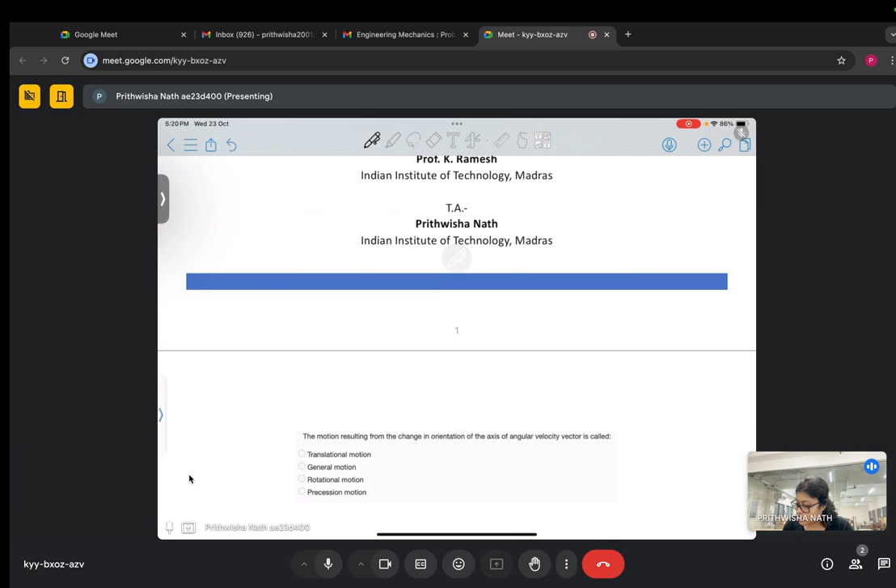The first question is: the motion resulting from the change in orientation of the axis of the angular velocity vector is called. The options are translational motion, general motion, rotational motion and precession motion. So which option is correct? It is precession motion, right? So that will be precession motion.

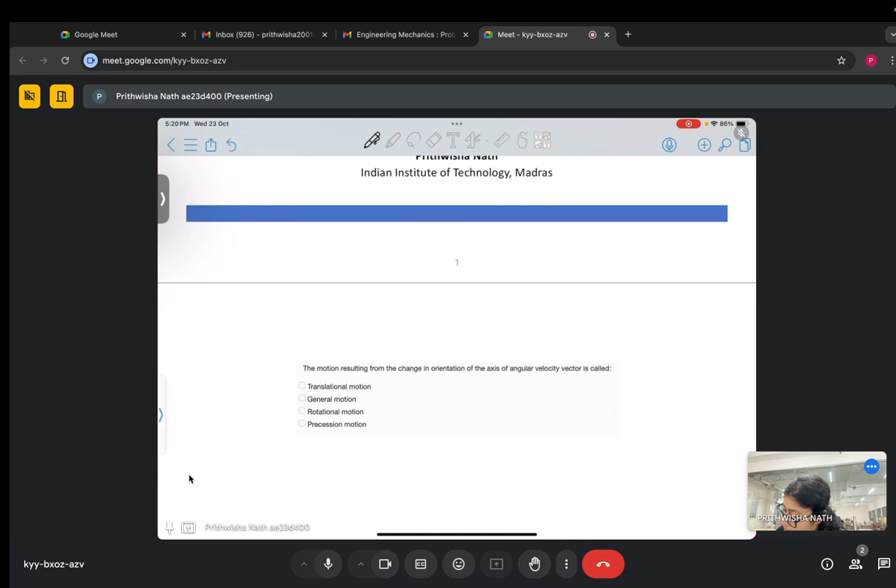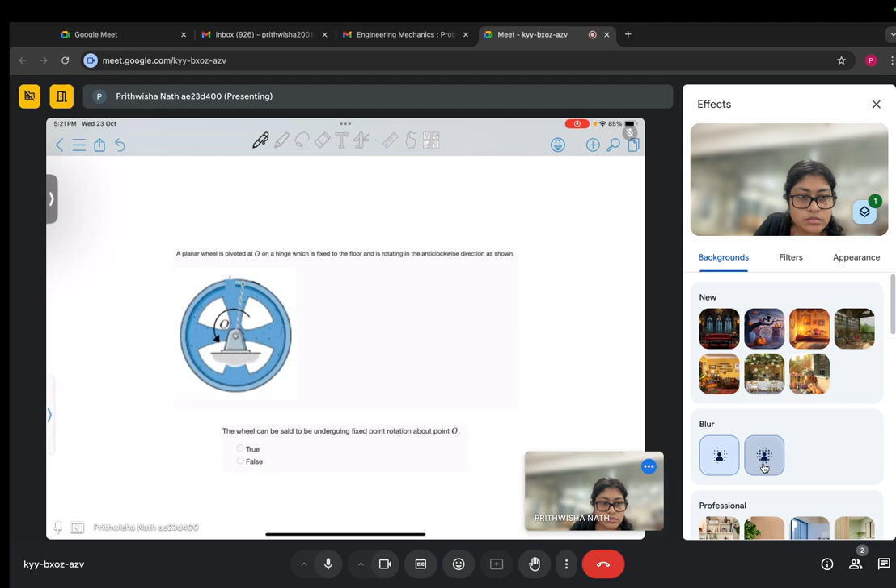Moving to the next problem: a planar wheel is pivoted at O on a hinge fixed to the floor and is rotating in the anti-clockwise direction as shown. The wheel can be said to be undergoing fixed point rotation about point O. Is this true or false? The wheel is not undergoing fixed point rotation, so this is false.

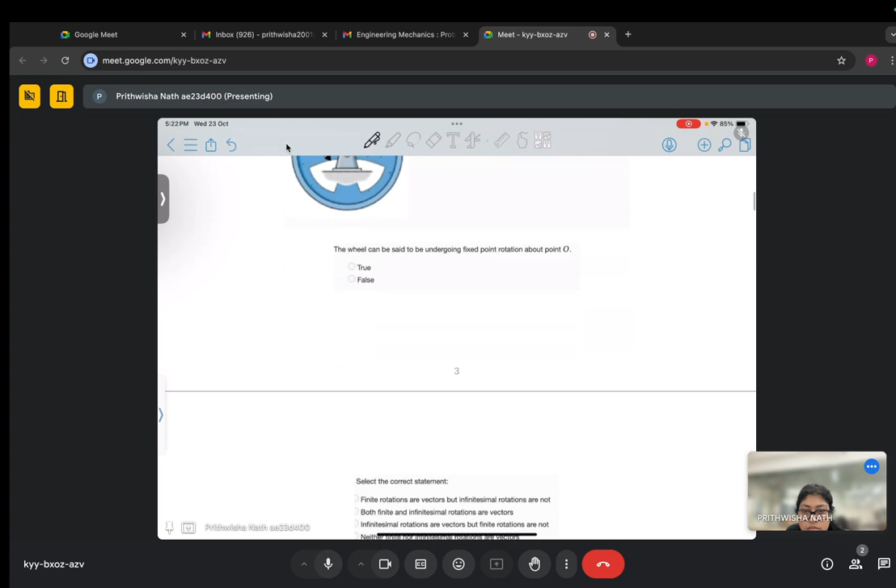Moving on to the next problem, select the correct statement.

Select the correct statement. Option one: finite rotations are vectors but infinitesimal rotations are not. Option two: both finite and infinitesimal rotations are vectors. Option three: infinitesimal rotations are vectors but finite rotations are not. Option four: neither finite nor infinitesimal rotations are vectors. So which option is correct? The third option is correct, that is, infinitesimal rotations are vectors but finite rotations are not.

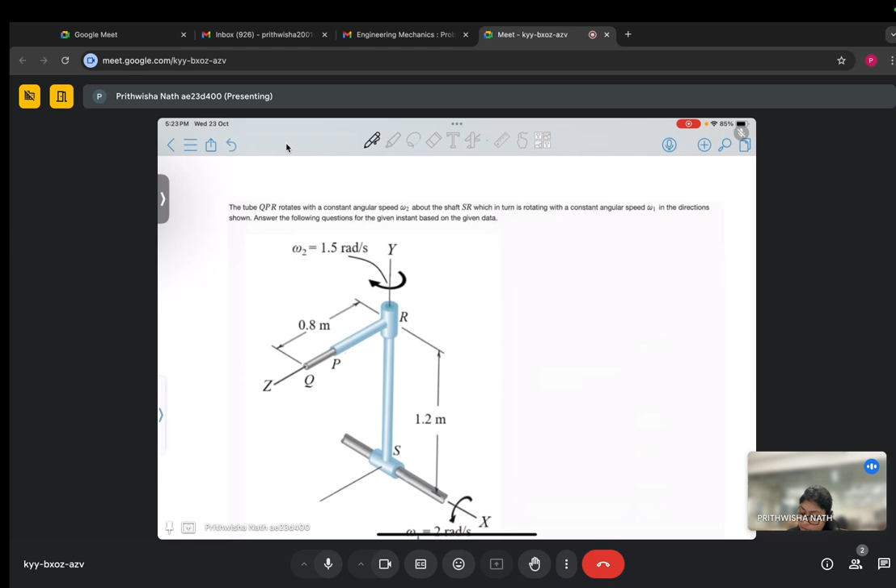Now moving on to the next problem. The tube QPR rotates with a constant angular speed omega 2 about the shaft SR, which in turn is rotating with constant angular speed omega 1 in the directions shown. Answer the following questions for the given instant based on the given data. Omega 2 is given as 1.5 and omega 1 is 2. So the tube QPR rotates with angular speed omega 2 about the shaft, and the shaft itself rotates with angular velocity omega 1. Now what are the questions we need to answer?

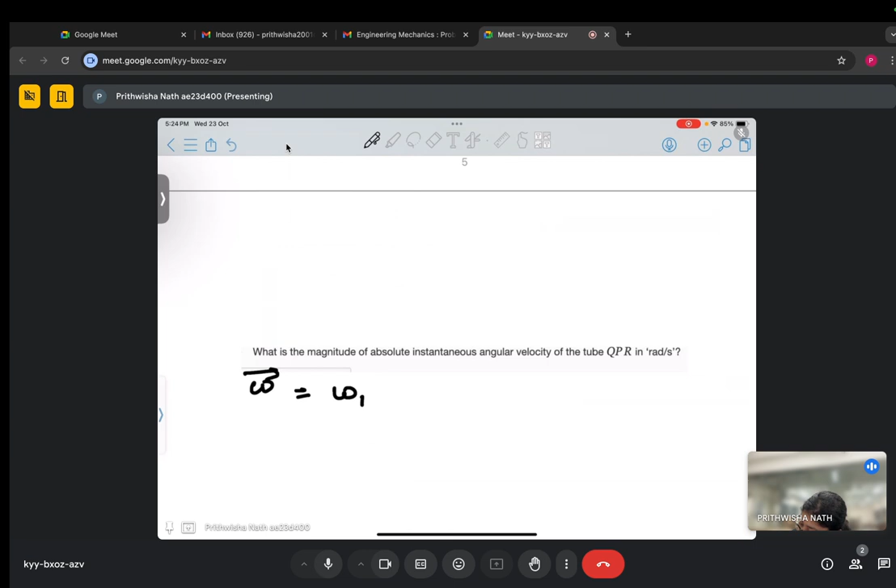What is the magnitude of absolute instantaneous angular velocity? How can we find omega? Omega is nothing but omega 1 plus omega 2. Now what is omega 1? Omega 1 is 2i, and omega 2 is minus 1.5j.

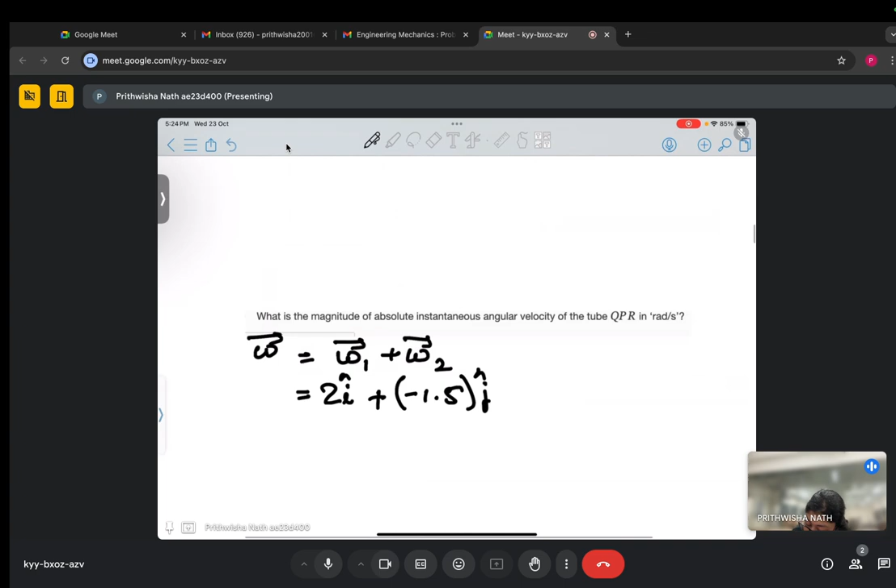So omega can be written as 2i minus 1.5j. Now we need to find the magnitude of the absolute instantaneous angular velocity. For doing that, we just compute the magnitude of omega, which gives us the answer in radian per second.

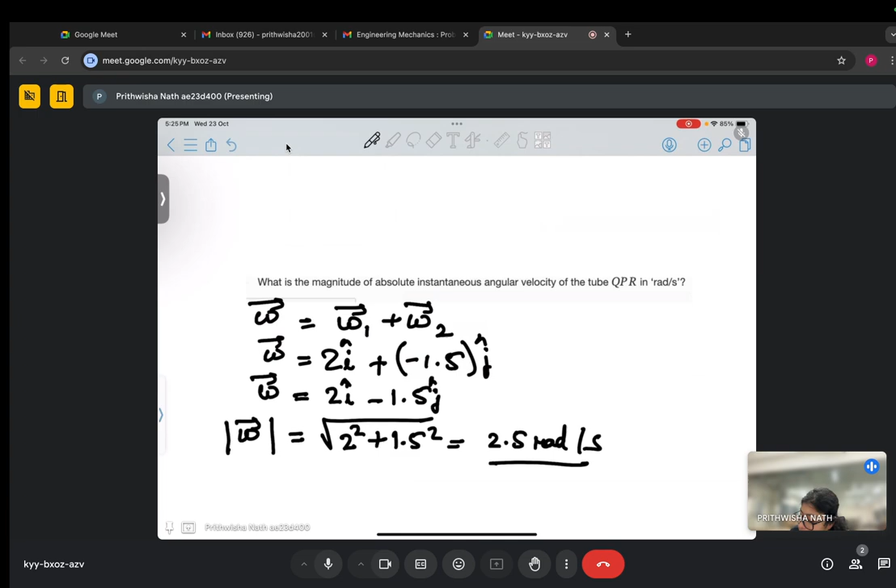Now for the next part of the problem: what is the magnitude of absolute instantaneous angular acceleration of the tube QPR in radian per second square? We need to find the magnitude of the absolute instantaneous angular acceleration. So alpha can be written as this.

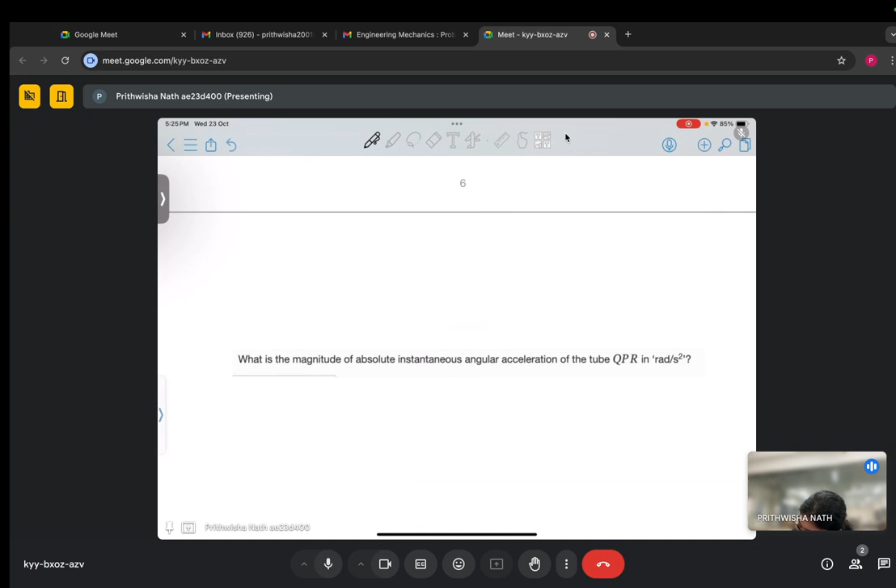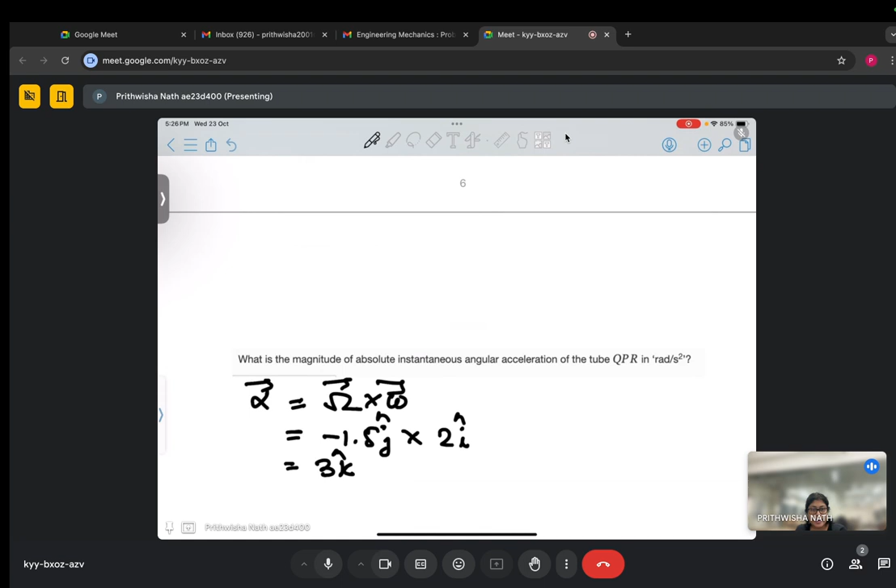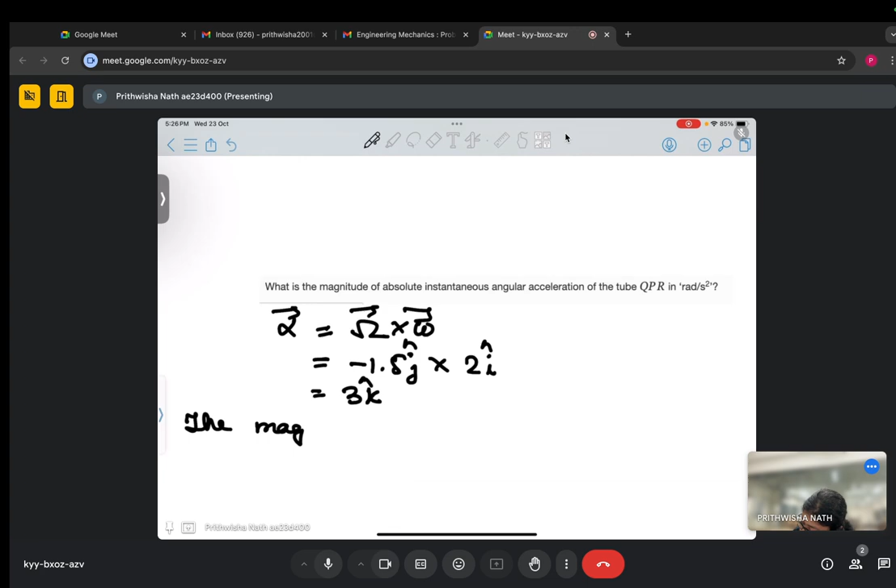We know that this is minus 1.5j cross 2i. Then what is the magnitude? The magnitude is nothing but 3. So the magnitude of the instantaneous angular acceleration of the tube is 3 radian per second square.

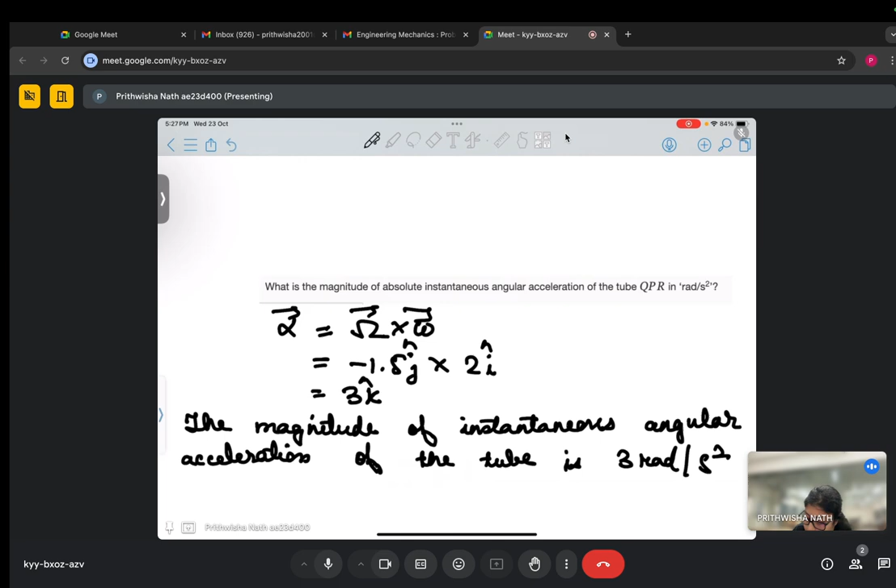Now they have asked for the x component of v. For finding the x component of v, first we need to find the position vector. What is the position vector? It can be seen from this figure: it is 0i, 1.2j and 0.8k. So R is nothing but 0i plus 1.2j plus 0.8k.

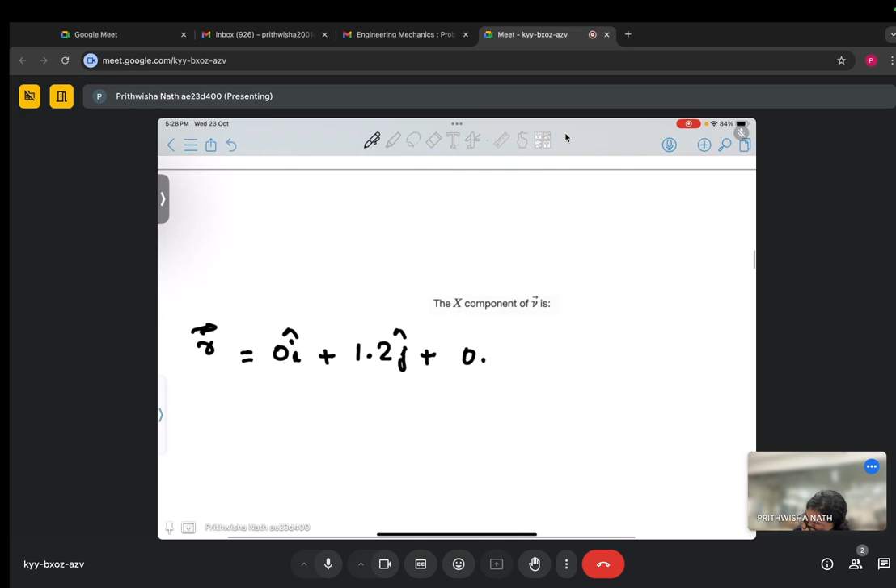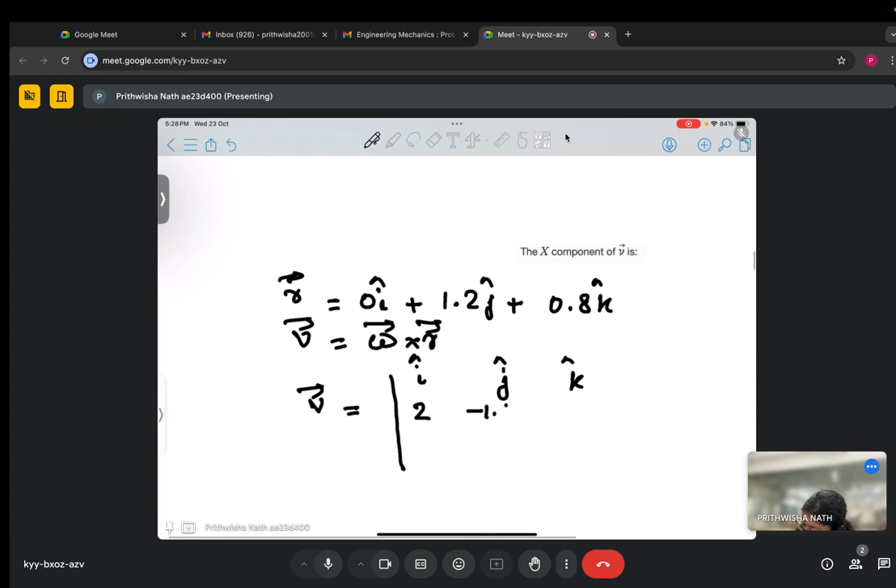V equals omega cross R. Then we just need to find the cross product. This is 2, minus 1.5, 0 cross 0, 1.2, 0.8. So you just calculate the cross product: i times minus 1.5 into 0.8, minus j times 2 into 0.8, plus k times 2 into 1.2. So that is nothing but minus 1.2i minus 1.6j plus 2.4k.

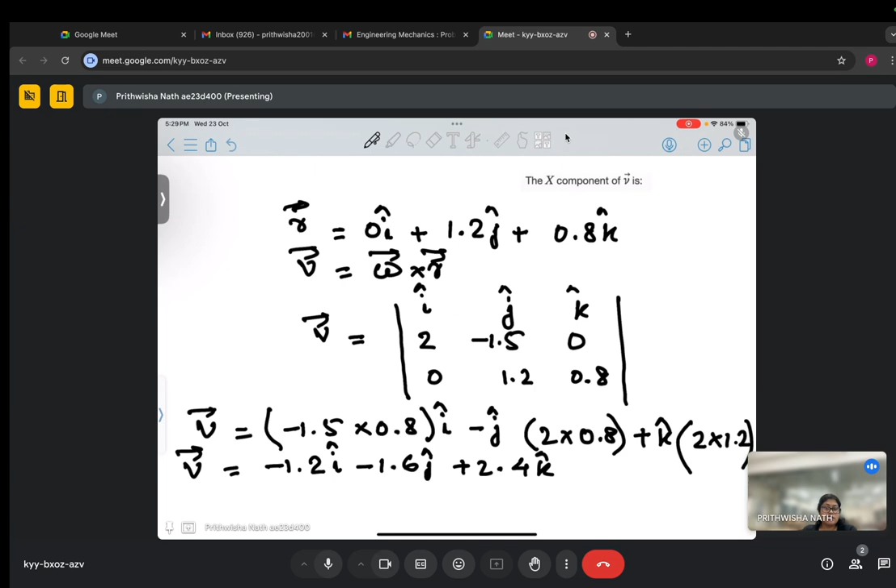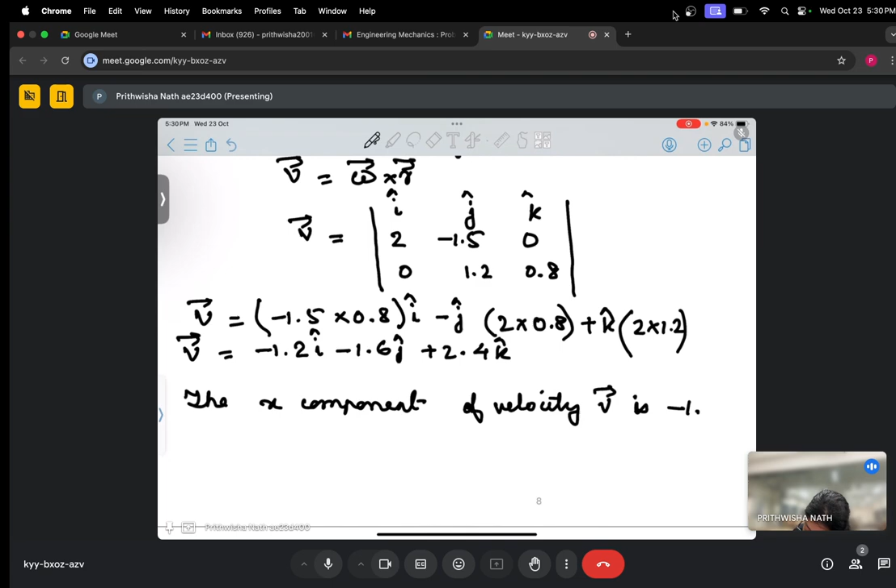Here they have asked us to calculate and find the x component. It's clearly seen that the x component is minus 1.2, the y component is minus 1.6, and the z component is 2.4. So the x component of velocity v is minus 1.2 and the y component is minus 1.6.

And the z component of v is nothing but 2.4.

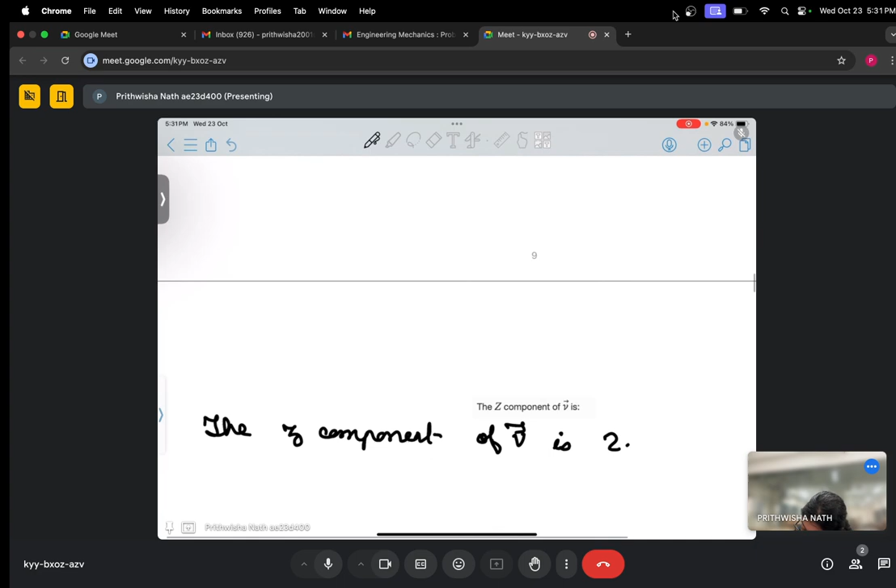Now moving on to the next problem. A crane operating at site constantly rotates at 1 radian per second about its vertical as shown. The boom of the crane supporting a weight is being lowered with angular velocity and angular acceleration as shown. Considering the positive coordinate directions as shown, answer the following questions for the instant depicted.

So what are the questions that we need to solve? They have asked us to find out the magnitude of the instantaneous angular velocity of the boom in radian per second.

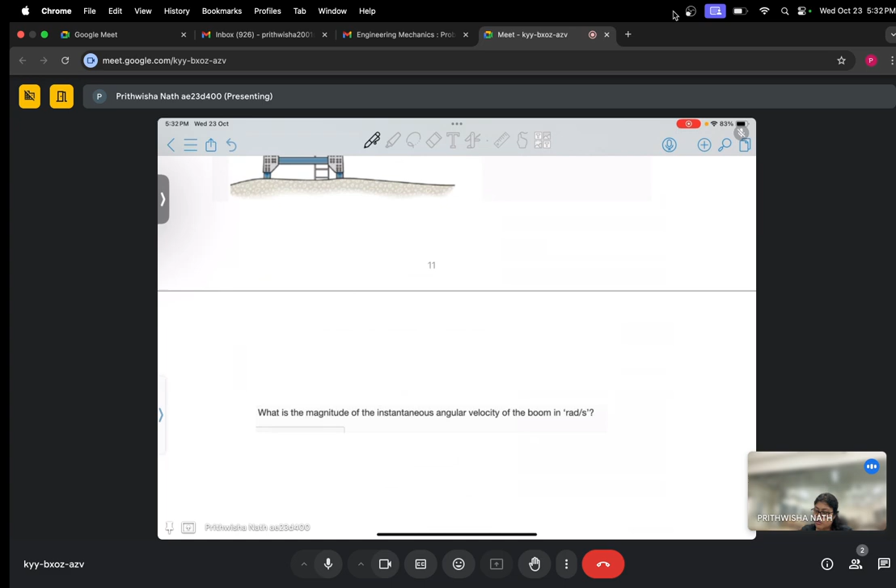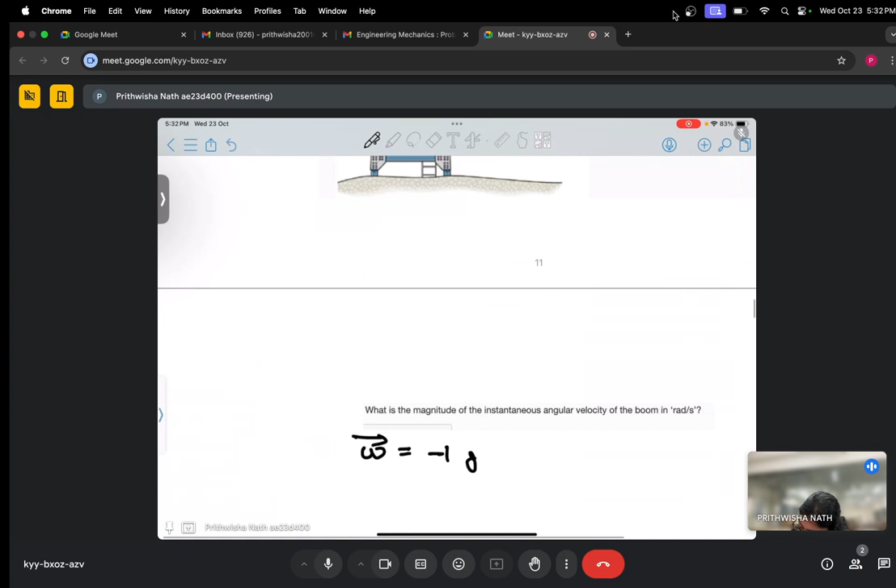So what is omega? Omega is nothing but this should be minus 1 j cap minus 0.5 k cap. So magnitude of omega will be nothing but square root of 1 square plus 0.5 square. That is 1.12 radian per second.

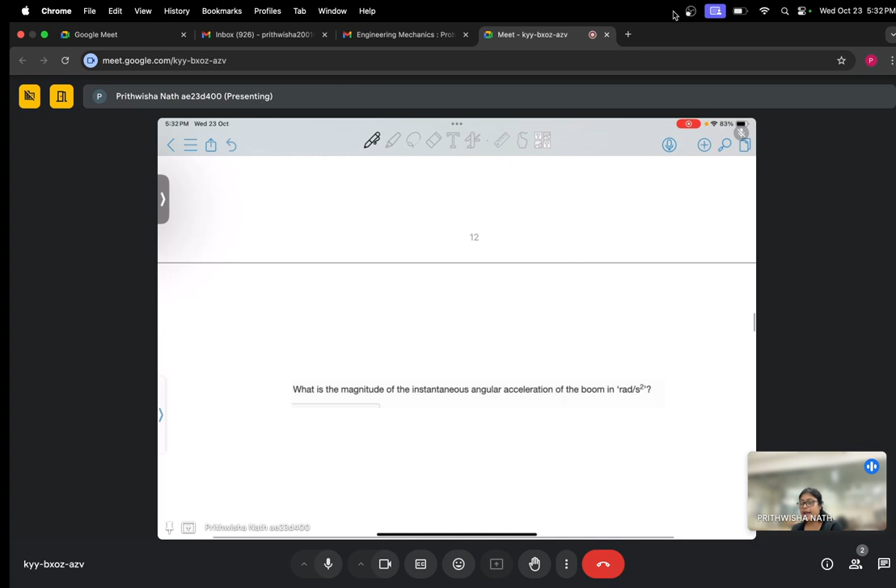Now what is the next question? What is the magnitude of instantaneous angular acceleration of the boom? Now first we need to find out alpha 1, that is minus 1j cross minus 0.5 k. So this is nothing but 0.5 I. Now there is another acceleration, that is this beta double dot, 0.2.

So the total acceleration would be the instantaneous acceleration of the boom in boom is alpha, that is 0.5 I plus 0j minus 0.2 k.

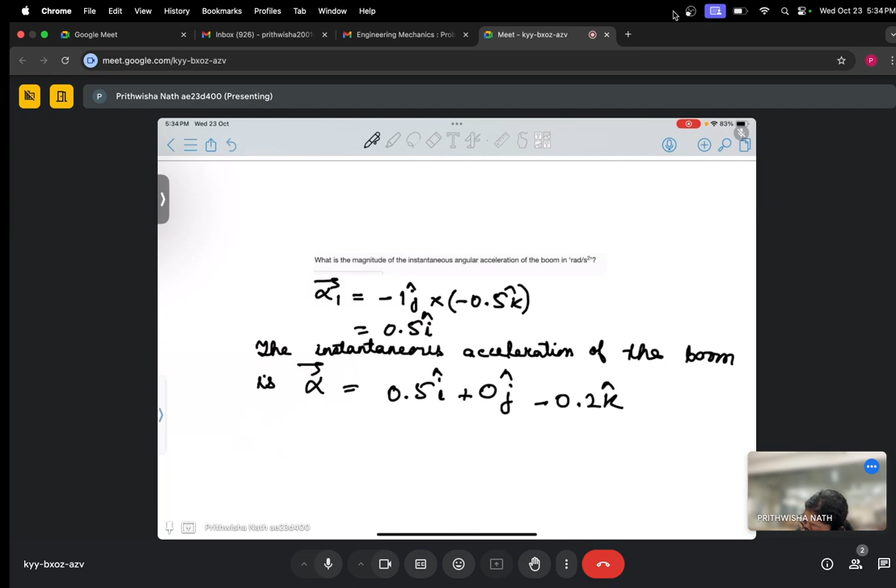Therefore, what is the magnitude? It's nothing but square root of 0.5 square plus 0.2 square. So the magnitude of the instantaneous angular acceleration of the boom is 0.54 radian per second square. So this is the magnitude of acceleration.

Now what they have asked is, let Vp represent the absolute instantaneous velocity of the tip of the boom in meter per second. So they have asked us to find out the x component of Vp.

So for finding out Vp, first we need to know the position vector of the point P. Thereafter we can find out omega cross r to find Vp. So first we have to know the position vector. The position vector of P is r, let it be r.

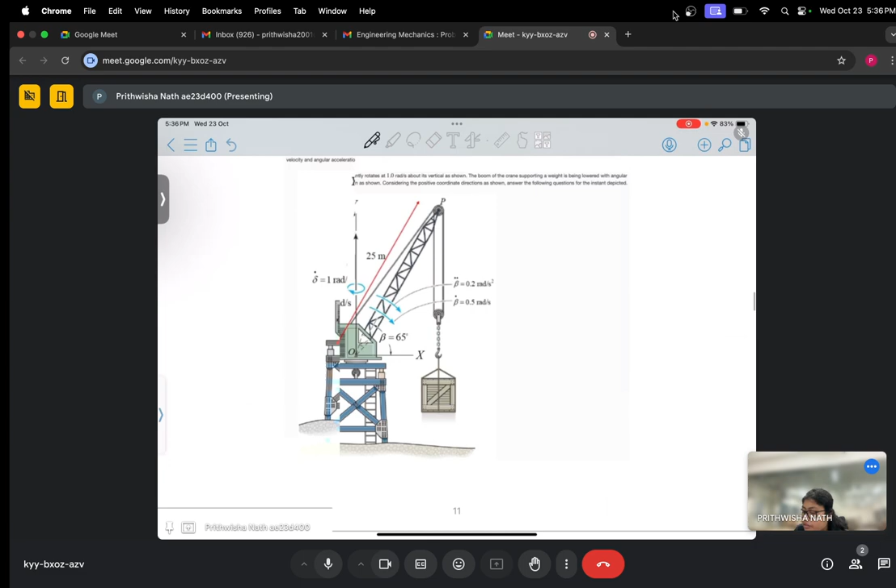So from the figure we can see that the x component is 25 cos of 65 degree and the y component is 25 sine 65 degree. So r is 25 cos 65 I plus 25 sine 65 j plus 0 k.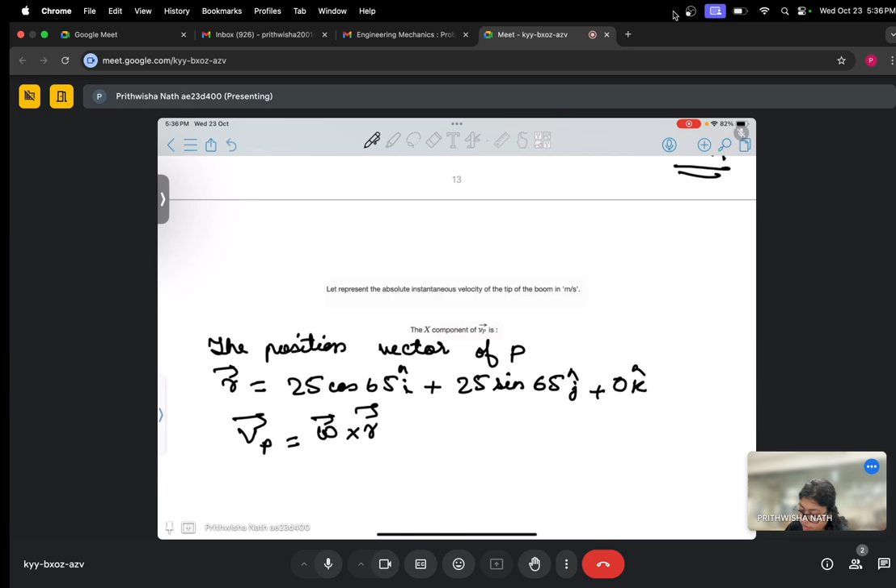Now to find out the instantaneous velocity, now we know omega, we know r, so we can calculate Vp. So let's write this: 0I minus 1j minus 0.5k cross 25 cos of 65 I plus 25 sine 65 j plus 0 k. Therefore Vp will be

I j k. Write it in the next page. So this will be (0.5) into 25 sine of 65 degree, 0.5, 25 cos 65 degree, 25 cos 65 degree. So I just need to simplify this now.

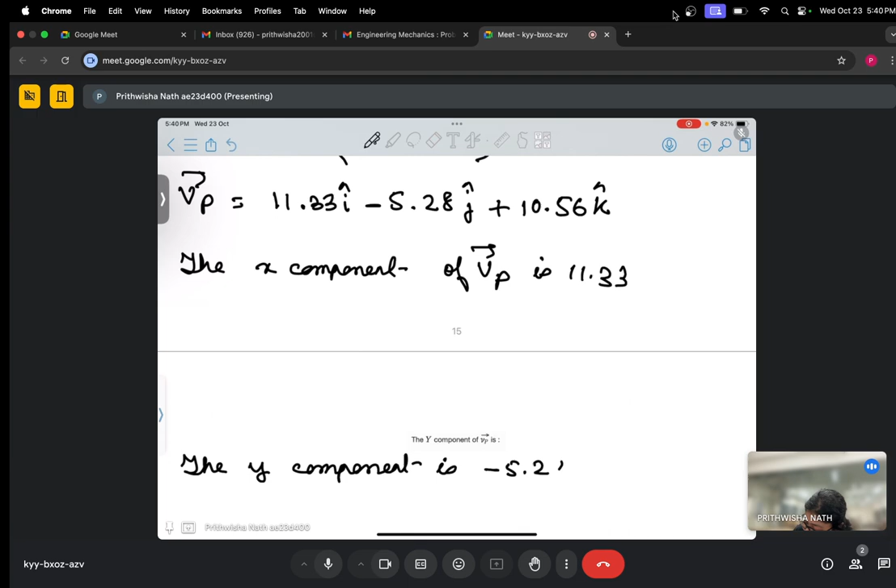So what we need to find is the x, y and z components. So from here we can see what are the x, y and z components. So the x component is 11.33. The y component is minus 5.28 and the z component is 10.56.

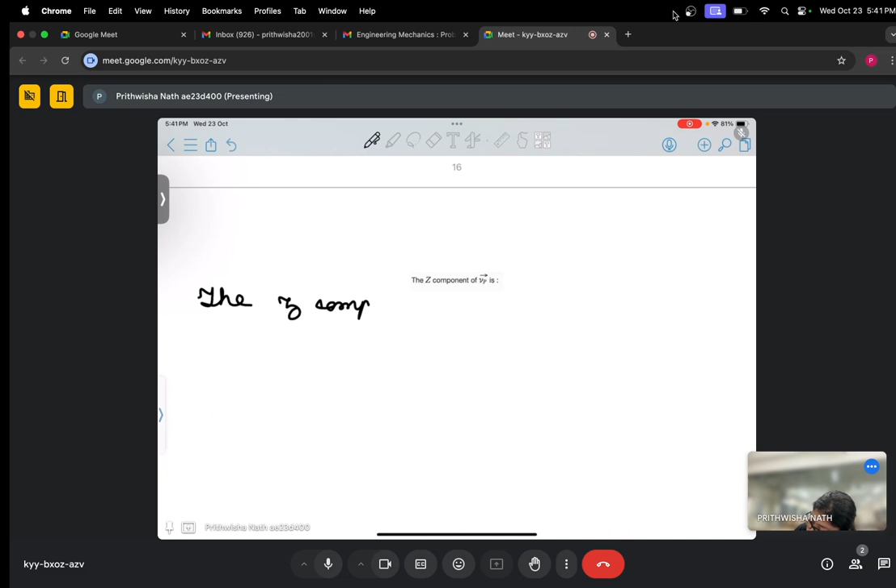Now what we need to do is the next problem, the next part of the problem, what they have asked is let AP represent the absolute instantaneous acceleration of the tip P, and they have asked for the x component of AP, the y component of AP and the z component of AP.

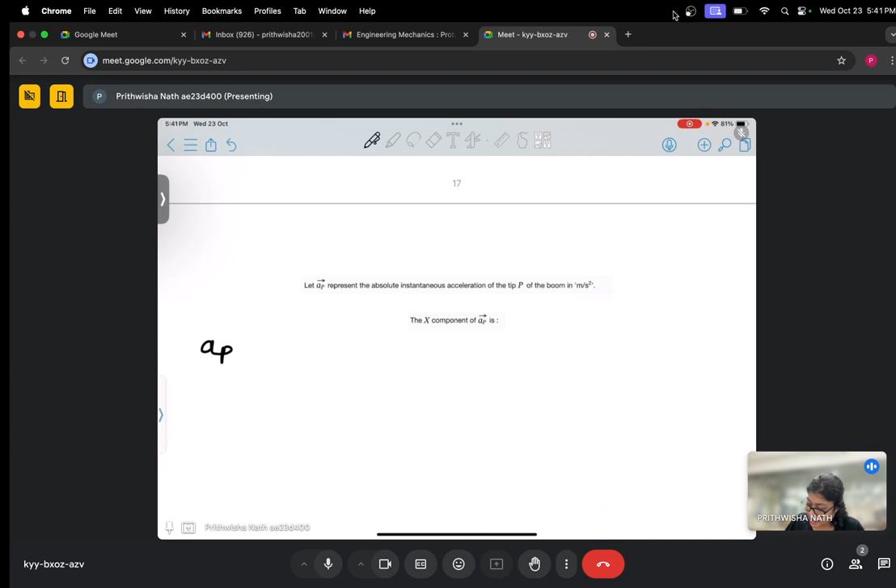So to find out AP, we just need to use the formula, that is AP equal to alpha cross R plus omega cross V. So AP is alpha we already know, R we know, omega we know, and V also we know. So we know all the quantities, we just need to substitute here.

0.5 I plus 0J minus 0.2 K cross, that is alpha cross R, 25 cos 65 I, 25 sin 65 J, and this is plus 0K, plus omega cross V.

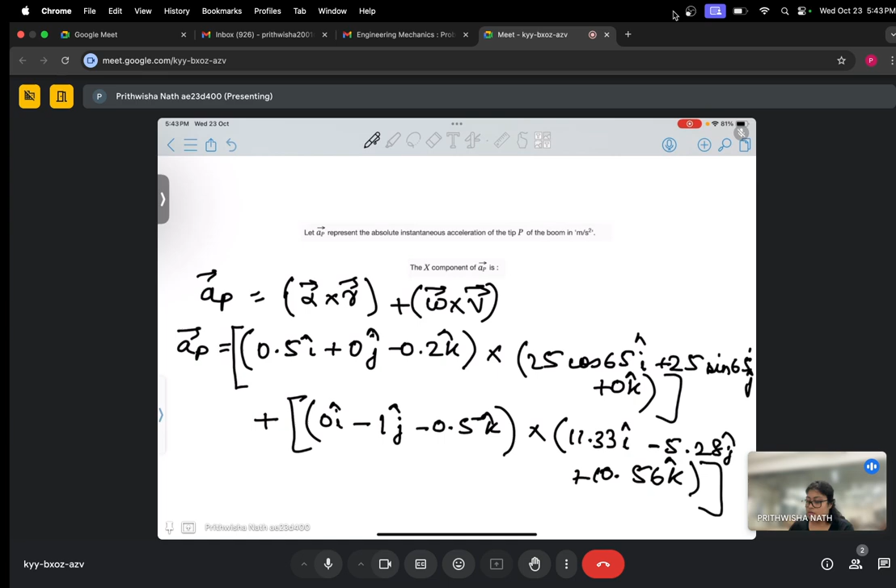Omega is 0I minus 1J minus 0.5 K cross 11.33 I minus 5.28 J plus 10.56 K. So what I'll do is I'll just solve this separately, like alpha cross R separately and then omega cross V separately, and then add these two quantities together. So that will be easier. So let this be 1 and let this part be 2. So first I will solve part 1.

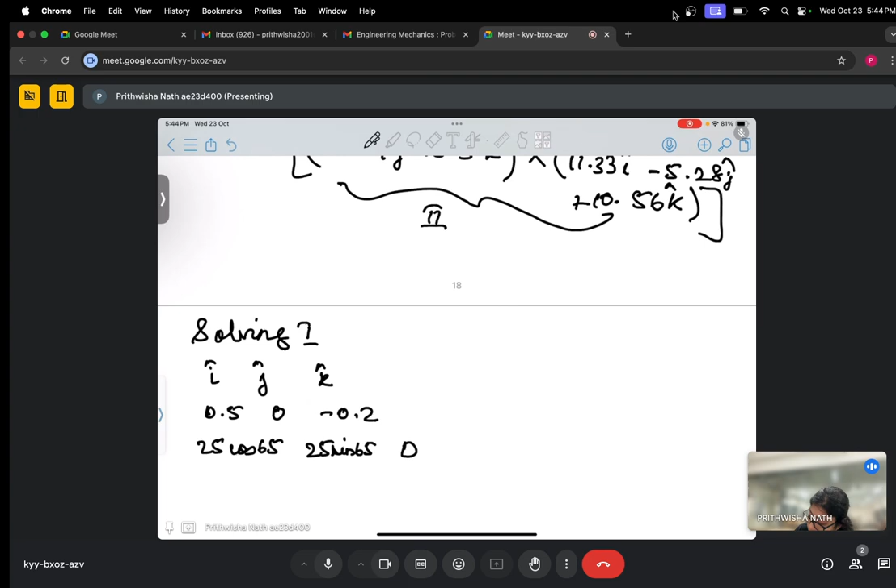I J K, 0.5, 0, minus 0.2, 25 cos 65, 25 sin 65 and 0. So we just need to solve this.

So I is 0.2 into 25 sin 65... 0.2 into 25 cos 65, plus K, 0.5 into 25 sin 65. Now just we have to simplify this.

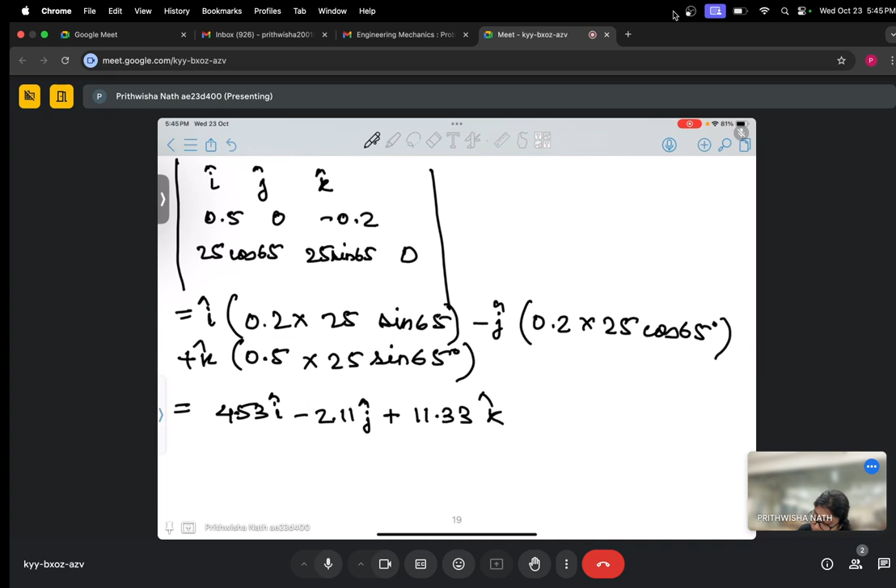That is nothing but 4.53 I minus 2.11j plus 11.33k, and then I'll solve this part, that is part 2.

This is 0 minus 1 minus 0.5, and that is 11.33 minus 5.28, and last is 10.56.

Solving this, so minus 10.56, again minus, so that is 2.64, 0.5 into 11.33, this is also 11.33k. Yeah, k is already written.

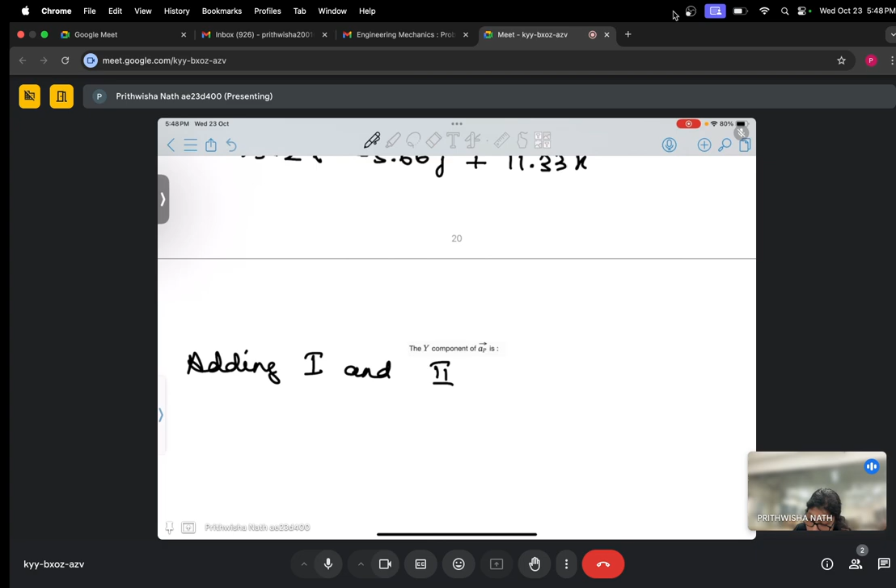Now adding 1 and 2. So first is 4.53 minus 13.2. Minus 2.11 minus 5.66, and the last one is 2, the same, so 2 into 11.33k.

So this becomes minus 8.67I minus 7.77J, and the last one is 22.66K.

So therefore we need to write the x component, y component and z component. So I'm writing the x component. The x component of AP is, you can see that it is minus 8.67, and the y component is nothing but minus 7.77, and the z component is 22.66.

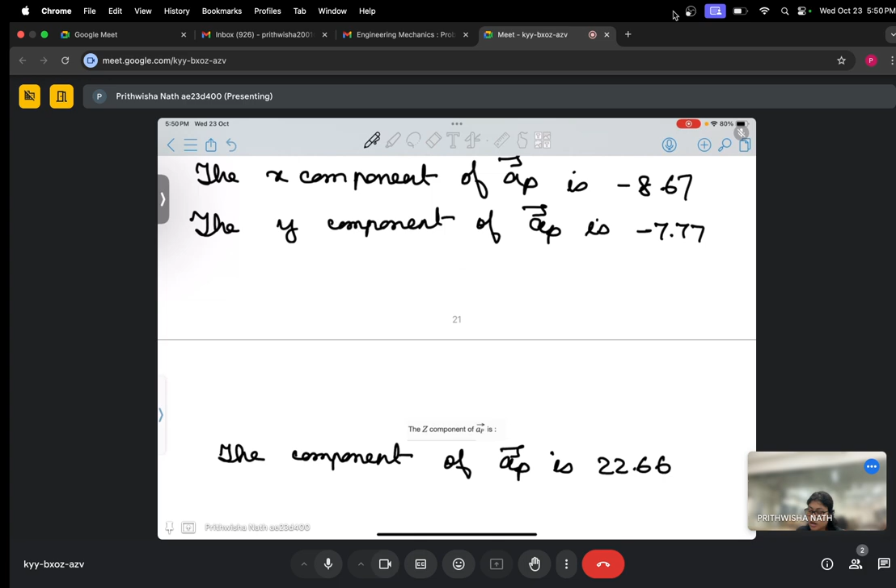So the y component of AP is minus 7.77, and the z component of AP is 22.66. Now, okay, so this problem is over.

Now moving on to the next problem. A cannon barrel rotates with an angular velocity omega 2 of magnitude 1.5 radian per second while placed on a platform which is rotating with an angular velocity omega 1 which is equal to 3.5 radians per second, and angular acceleration omega 1 dot, that is 0.5 radian per second square. A cannonball is fired at a distance of r equal to 3 meter at that instant depicted. Further, it is known that at this instant r dot and r double dot is 150 meter per second and 25 meter per second square respectively, measured relative to the barrel.

Now these quantities, that is r dot and r double dot, are measured relative to the barrel. Answer the following questions for the instant when theta equal to 40 degree.

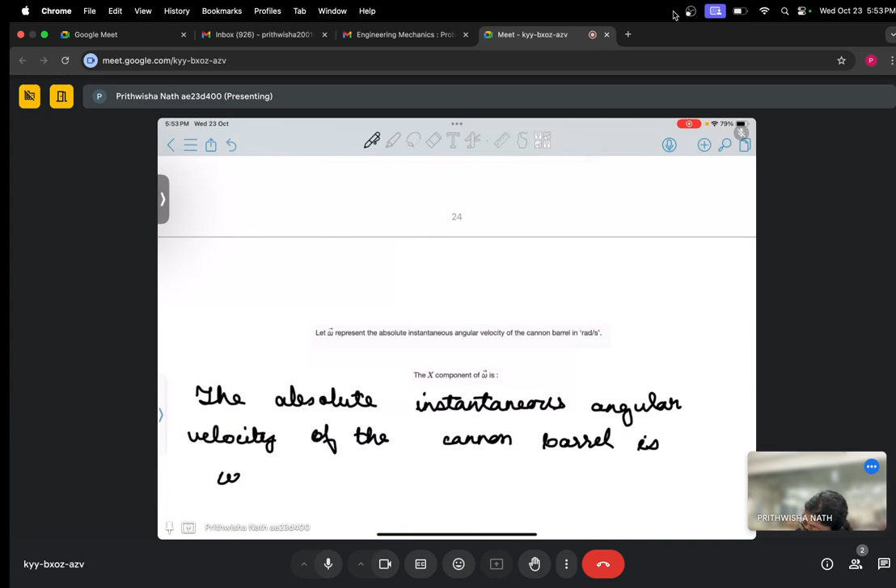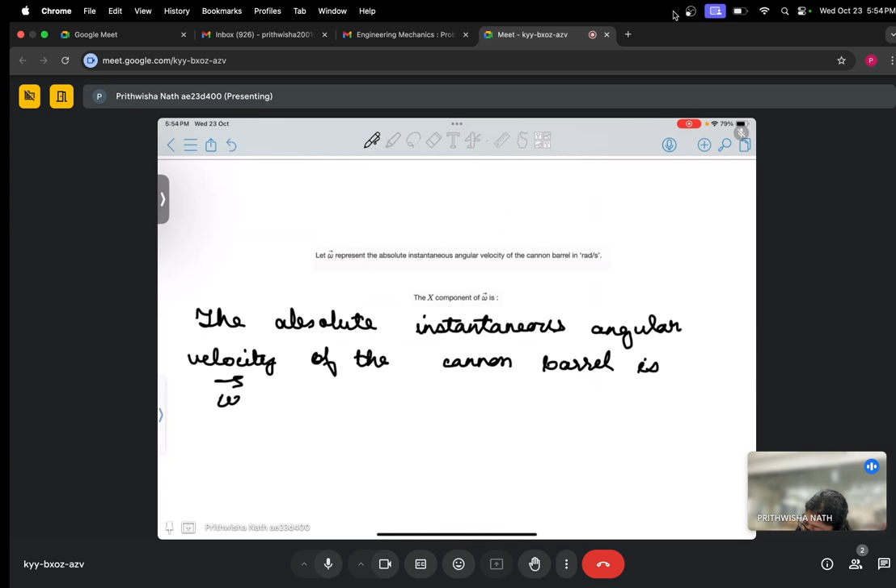So omega can be written as, therefore the absolute instantaneous angular velocity of the cannon barrel is this, omega. So we can see omega 1 is in the negative y direction, so that is minus 3.5 j, and omega 2 is in the negative x direction, so that is minus 1.5 I minus 3.5 j, that's omega. So now we have to find out, and there is no z component, so that is 0k.

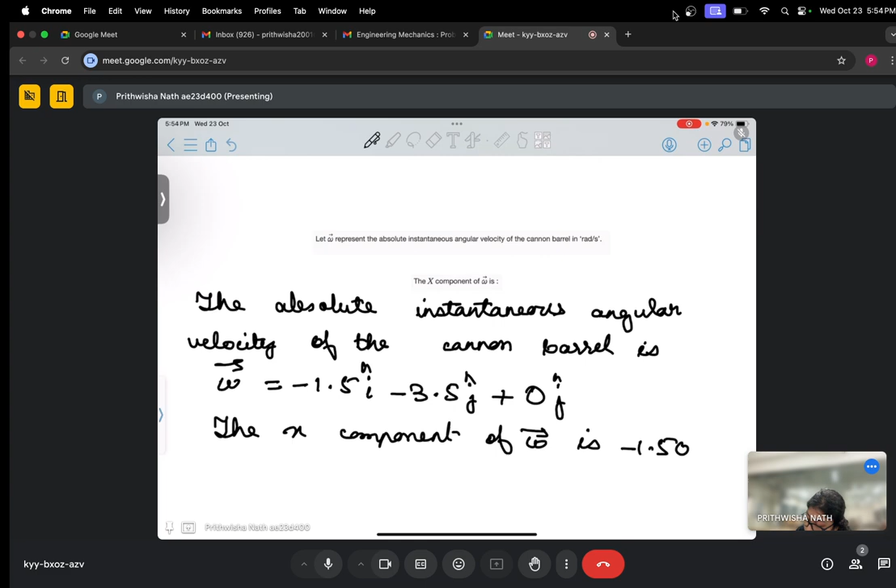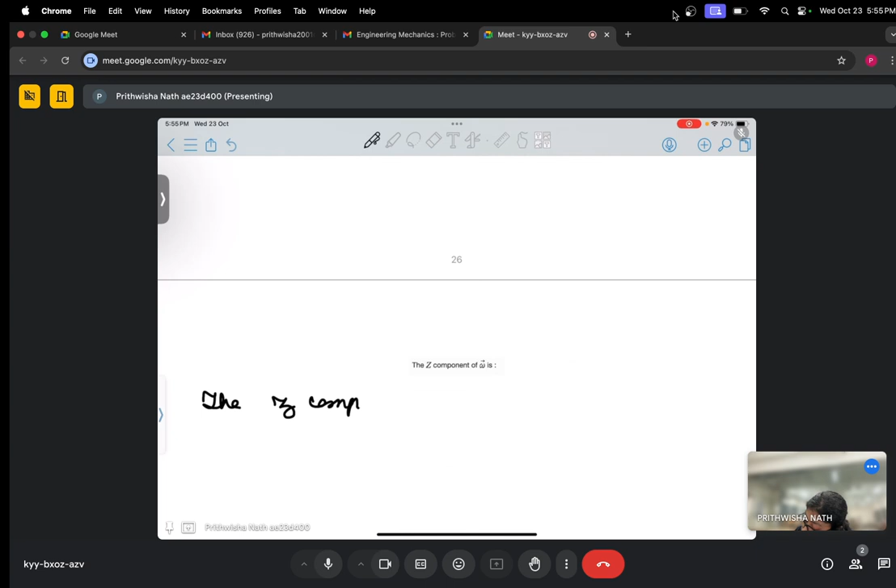So the x component of omega is minus 1.5, the y component of omega is minus 3.5, and the z component of omega is nothing but 0. As you can see, there is no z component in this omega.

So these are the problems that we solved for this week. So the first problem was: the motion resulting from the change in orientation of the axis of angular velocity is called precession motion.

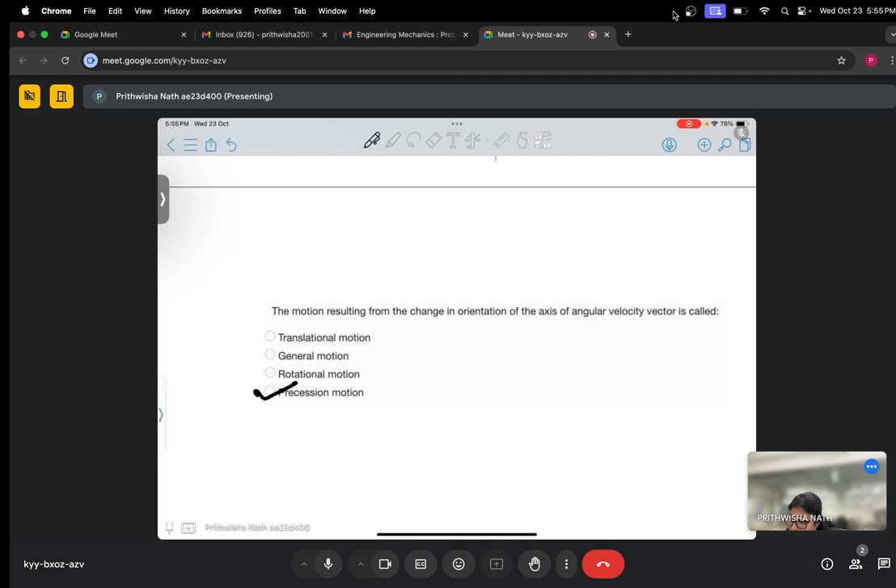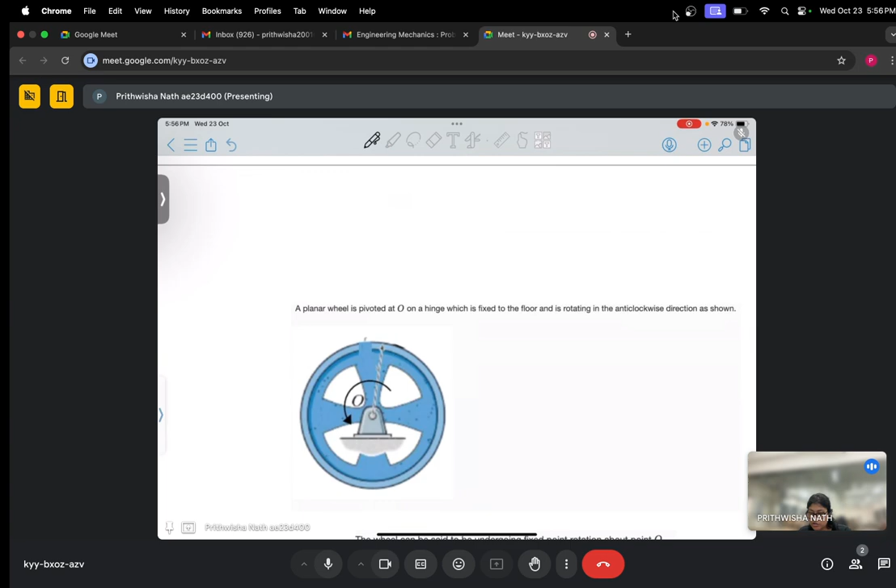The second problem was a planar wheel is pivoted at O on a hinge which is fixed to a floor and is rotating in the anticlockwise direction. So they have asked whether the wheel can be said to be undergoing a fixed point rotation. So it's not a fixed point rotation. So this is false.

And next, what we need to find is select the correct statement: that finite rotations are vectors but infinitesimal rotations are not. Both finite and infinitesimal rotations are vectors. Third option is infinitesimal rotations are vectors but finite rotations are not. And the fourth option is neither finite nor infinitesimal rotation are vectors.

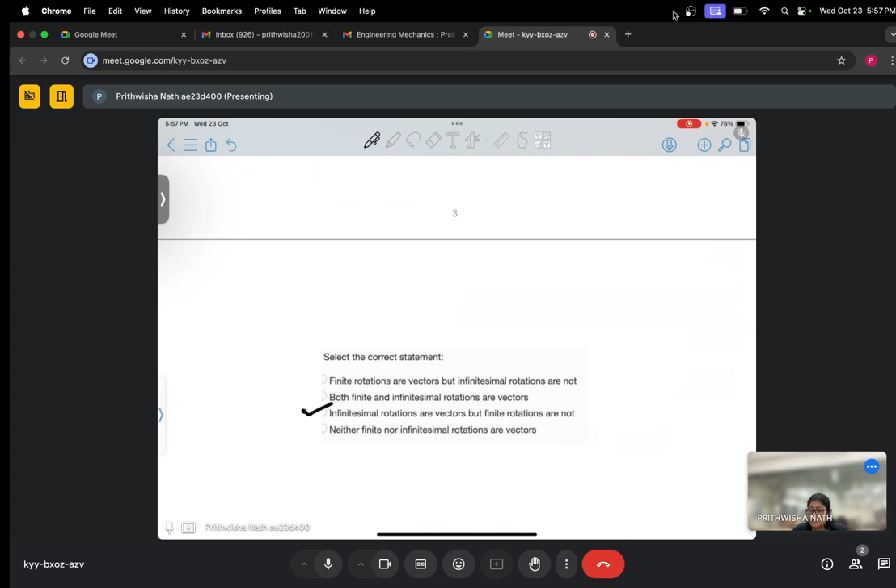So which one is correct? The third one is correct, right? That is infinitesimal rotations are vectors but finite rotations are not.

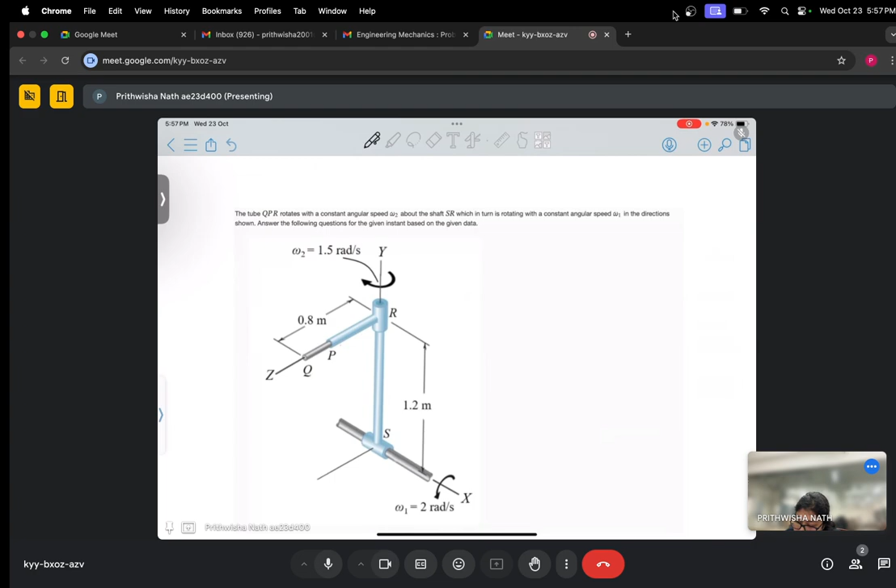Now the next problem is this one. This QPR is rotating also about this shaft SR, and this SR is also rotating with an angular velocity of omega. So the first part of the problem is find out the magnitude of absolute instantaneous angular velocity. That we can find out, right?

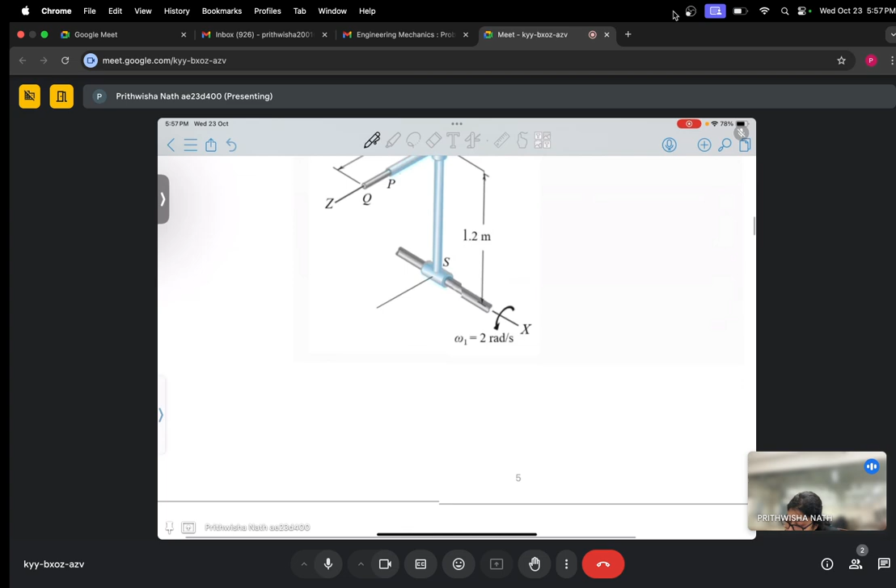Omega, that is omega 1 plus omega 2, that is nothing but omega 1 is 2, omega 1 plus omega 2, omega 1 is 2i and omega 2 is minus of 1.5j, that is in the negative y direction, right? So that gives omega equal to 2i minus 1.5j. So the magnitude of omega is square root of 2 square plus 1.5 square, that is equal to 2.5 radian per second.

Now in the next part we are asked to find out the magnitude of absolute instantaneous angular acceleration. Now first we find out alpha, that is nothing but minus 1.5j cross 2i, which is equal to 3k. And we can easily see that the magnitude is nothing but 3 only, that is 3 radian per second square.

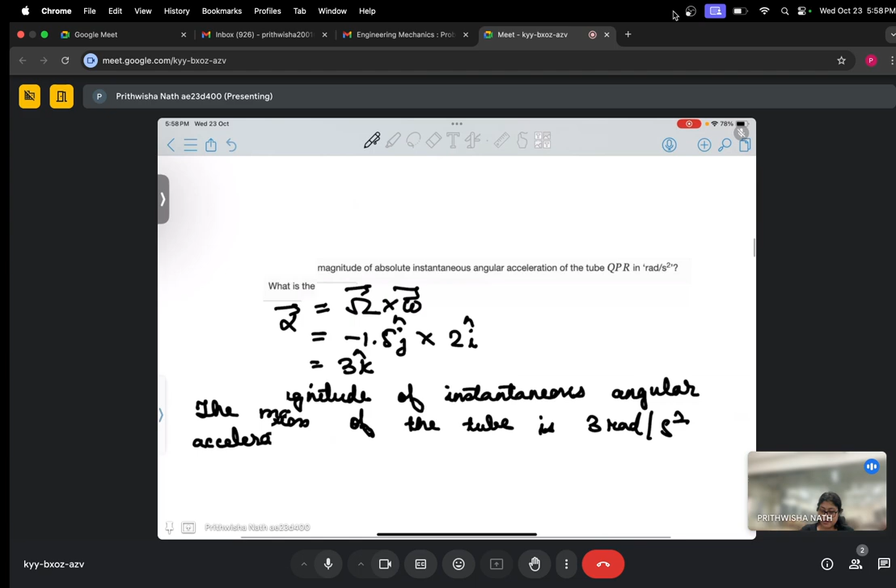Now what we are asked to find is the x component of v. For finding out v, we first need to know r.

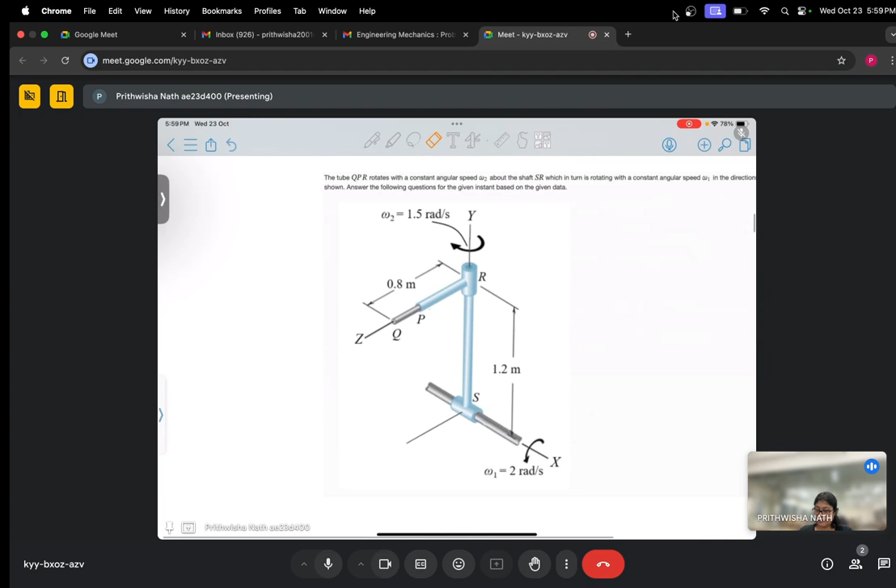R is nothing but 0i plus 1.2j plus 0.8k. This can be seen from the figure itself. You can very well see this. So I know r, I know omega, so I can calculate v, right?

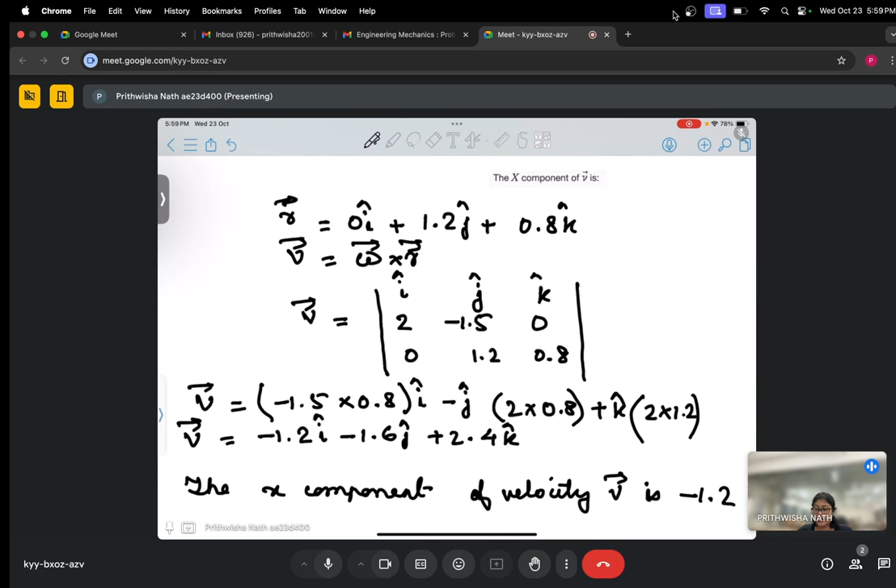That is nothing but the cross product of omega and r. So I just calculated this and found out v to be minus 1.2i minus 1.6j plus 2.4k.

So the x component, as you can see from here, is nothing but minus 1.2, the y component is minus 1.6, and the z component is 2.4.

In the next problem, a crane operating at the site constantly rotates at 1 radian per second about its vertical axis, as shown. So delta dot is given as 1 radian per second, so it is rotating about this y-axis.

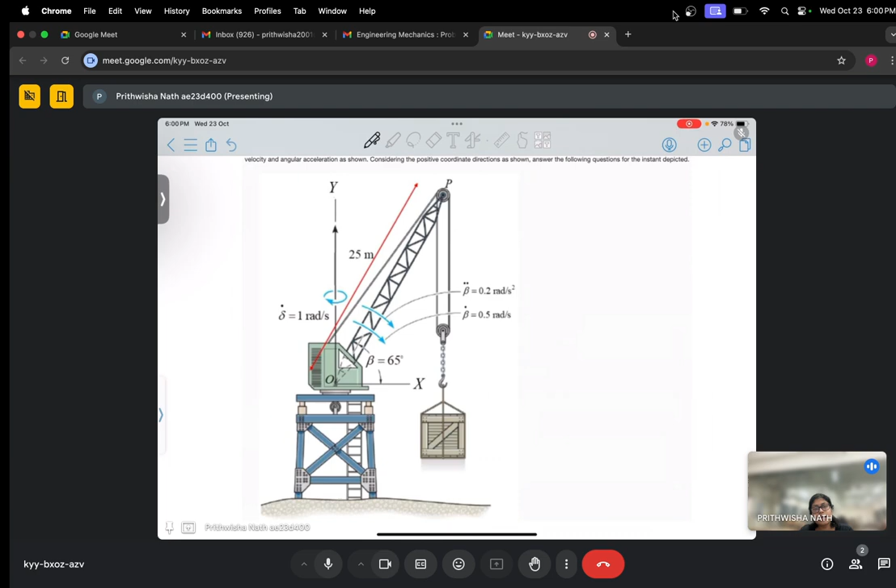The boom of the crane supporting a weight is being lowered with an angular velocity and angular acceleration as shown. We need to calculate several questions related to this. Beta is given as 65 degrees, beta dot, the angular velocity, is given as 0.5, and the angular acceleration is given as 0.2 radian per second squared.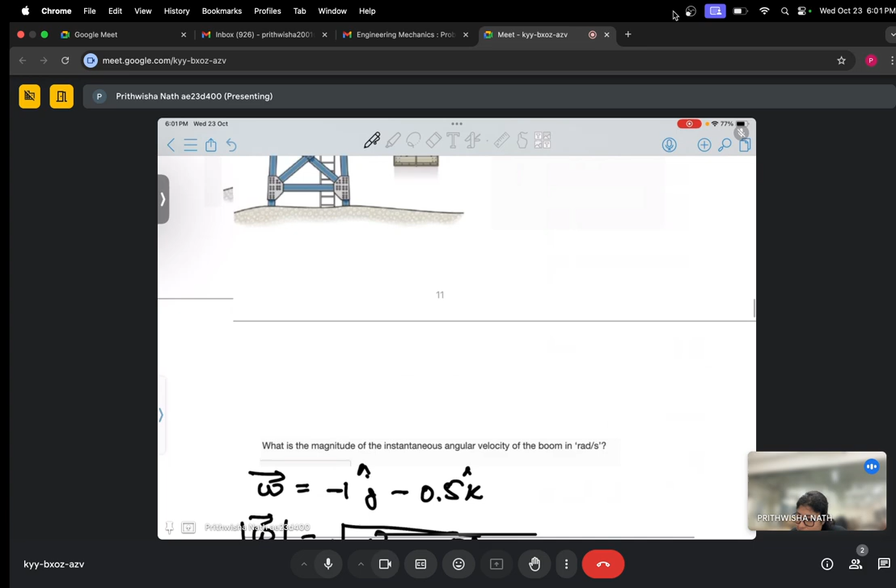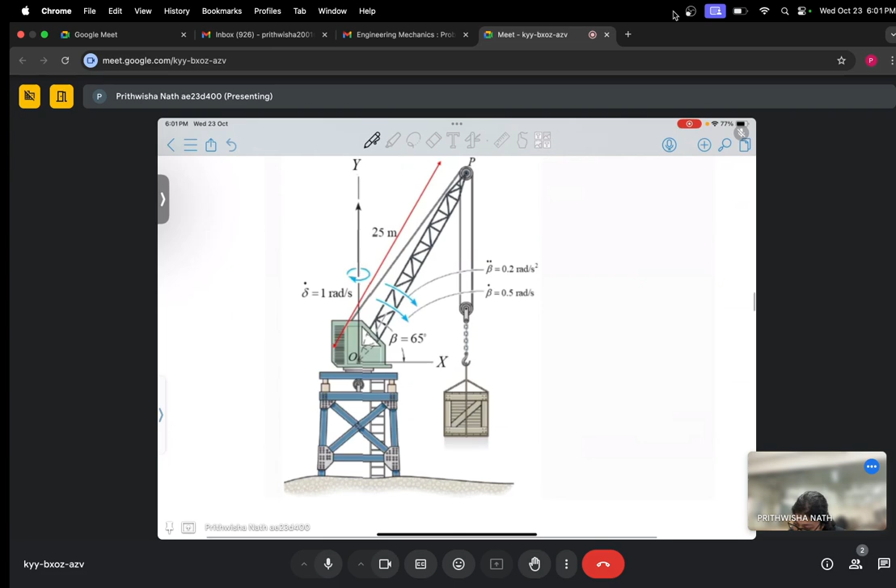So what is the magnitude of the instantaneous angular velocity? It's nothing but minus 1j. You can see it from the figure, right? Delta dot is 1 radian, so that will be minus 1j and minus 0.5k.

For finding out the magnitude, we just need to do square root of 1 square plus 0.5 square, which is nothing but 1.12.

Now the next part of the problem: what is the magnitude of the instantaneous angular acceleration of the boom? We need to find out alpha 1, that is minus 1j cross minus 0.5k, which gives 0.5i. Now to find out the total instantaneous acceleration, there is another component of 0.2, right?

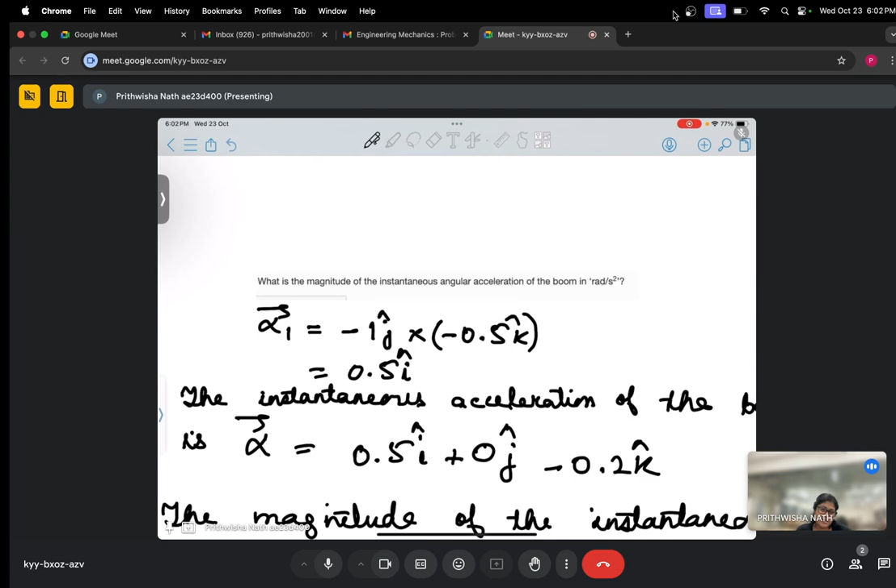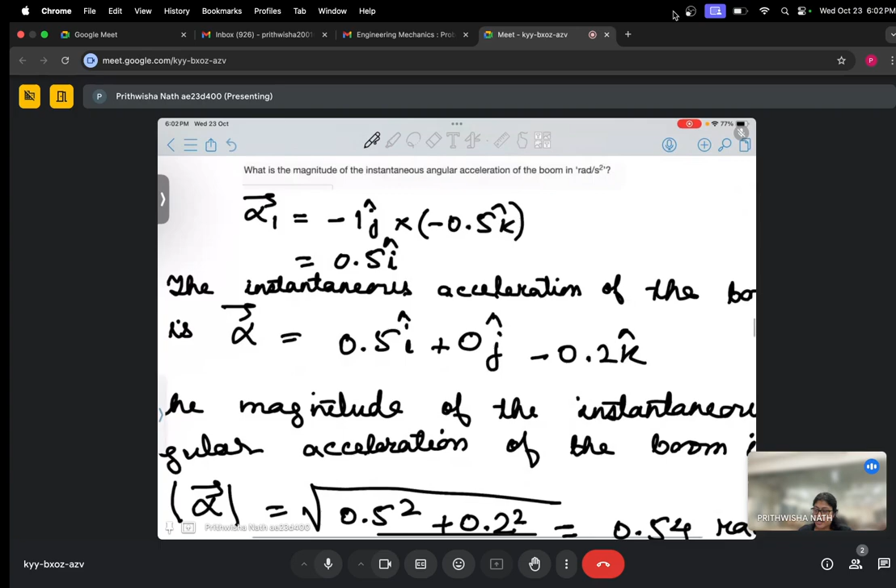That is the beta double dot, and this is with a negative sign. So this is the total acceleration, and now I have to find out the magnitude, which is nothing but square root of 0.5 square plus 0.2 square.

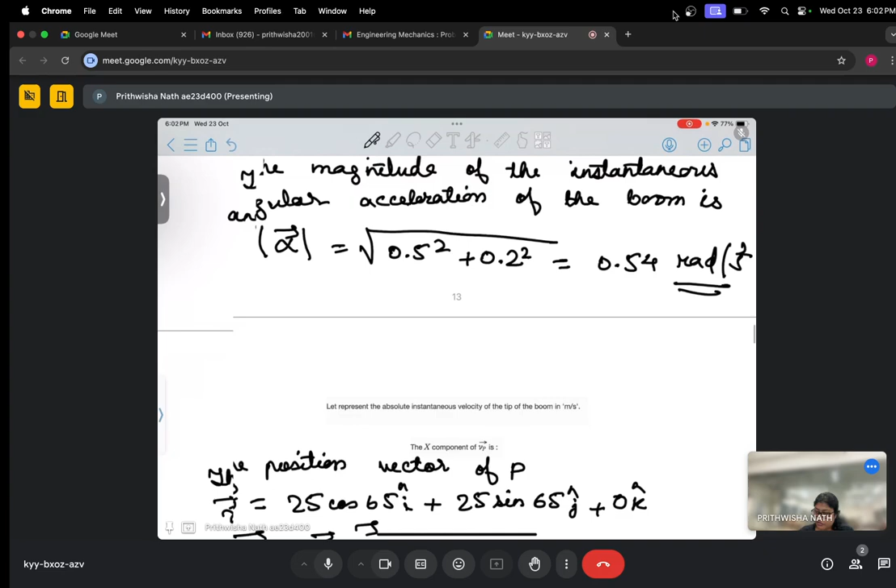That is equal to 0.54. Now they have asked to find out the instantaneous velocity of the tip of the boom. Similarly, like the other problem, we first need to find out the position vector of P, Rp.

We saw from the figure that it is nothing but 25 cos 65 i plus 25 sin 65 j plus 0, because there is no z component.

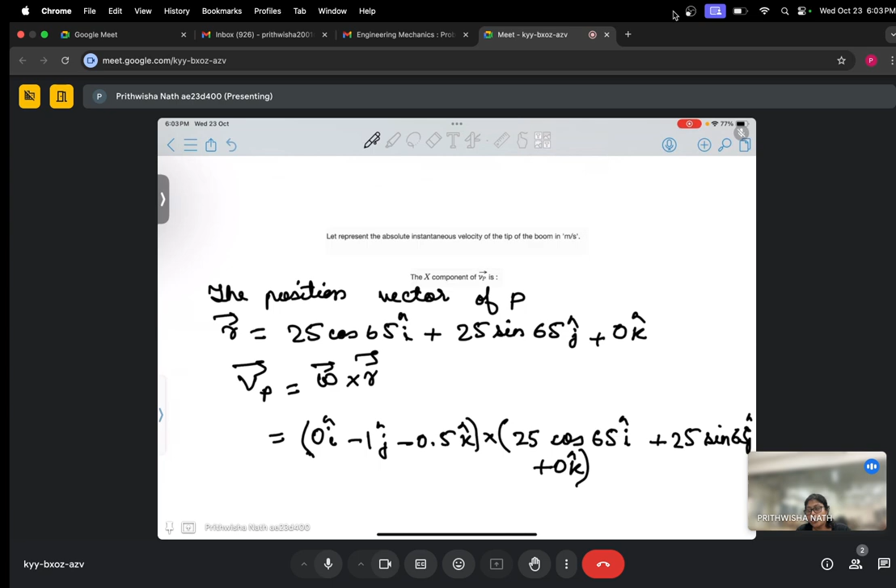Now Vp is nothing but omega cross r. I just substitute the values and get Vp as 11.33i minus 5.28j plus 10.56k.

So from here I can conclude that the x component is 11.33, the y component is minus 5.28, and the z component is 10.56.

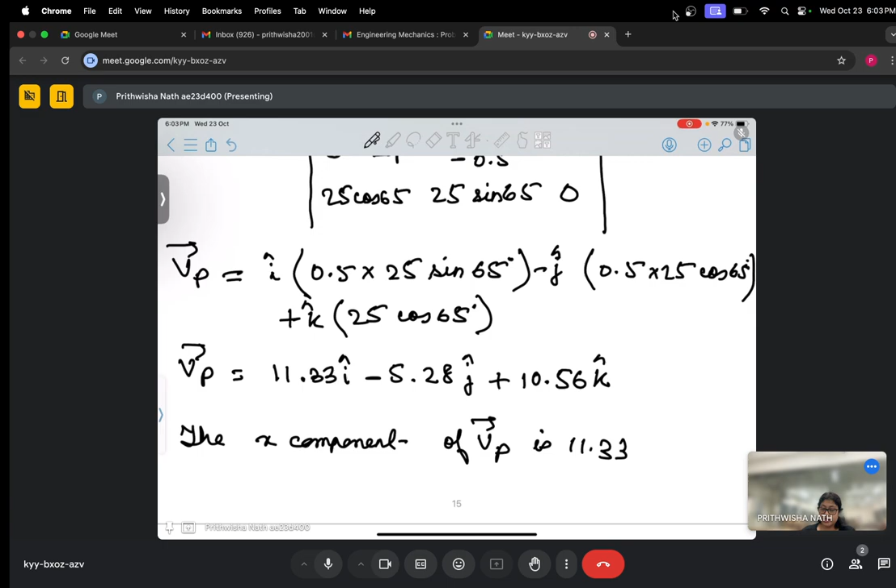Now the next part of the problem, we are asked to find out AP. So we just write the formula for AP, that is alpha cross r plus omega cross v.

I just substituted all the values and then separately solved for part 1 and part 2 and added these parts together. So this gives AP.

So the x component of AP is found out to be minus 8.67, y component is minus 7.77, and the z component is 22.66. So these are the components of AP.

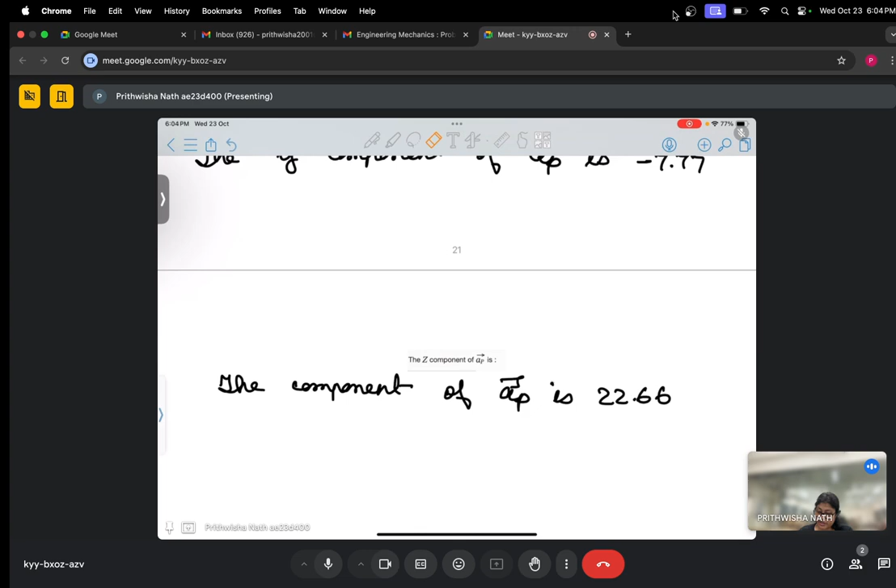Okay, so this problem is over. Now the last problem is of the cannon barrel, which we just now solved, which is rotating with an angular velocity of omega 2 equal to 1.5 radian per second, and it's placed on a platform which itself is rotating with the angular velocity of omega 1. These are the details given for this problem.

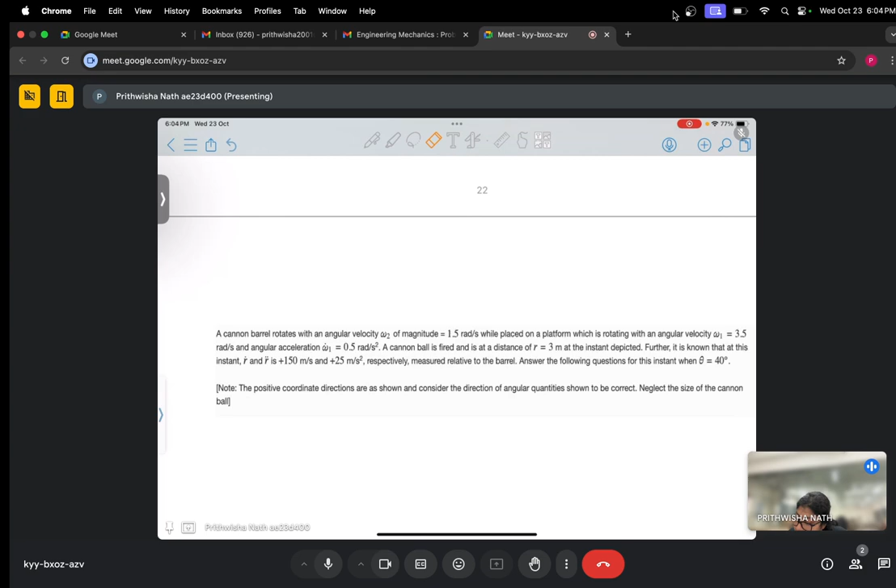Now we are asked to find out the angular... let omega represent the absolute instantaneous angular velocity of the cannon. So we need to find out omega.

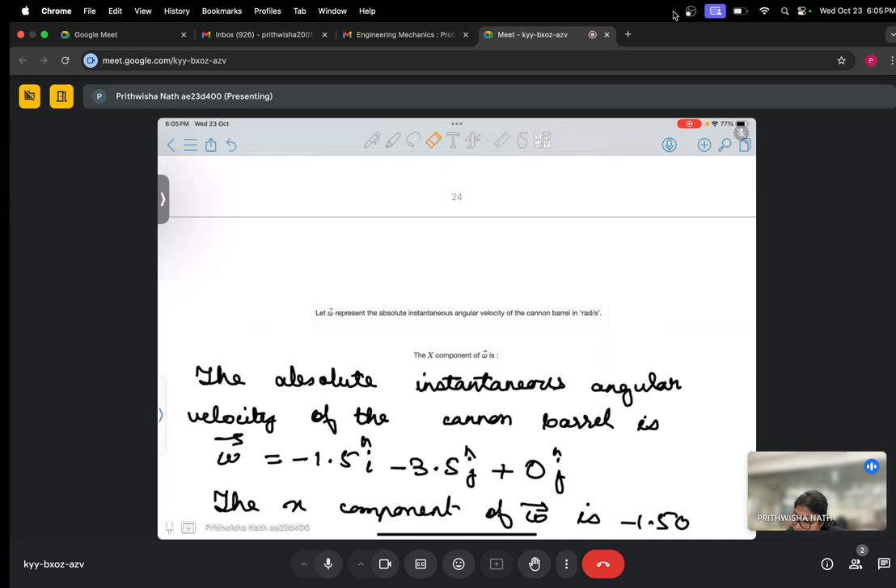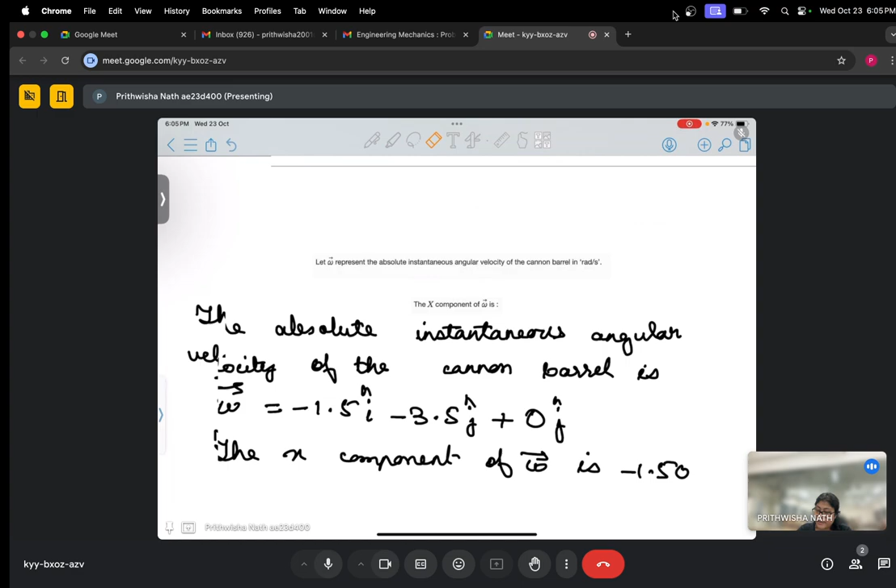So omega is nothing but minus 1.5, omega 2 is minus 1.5i. Yeah, omega 2 is 1.5, but it is in the negative direction, so that is with a minus sign. Similarly, omega 1 is 3.5, but that is also in the negative y direction, so that is with a minus sign.

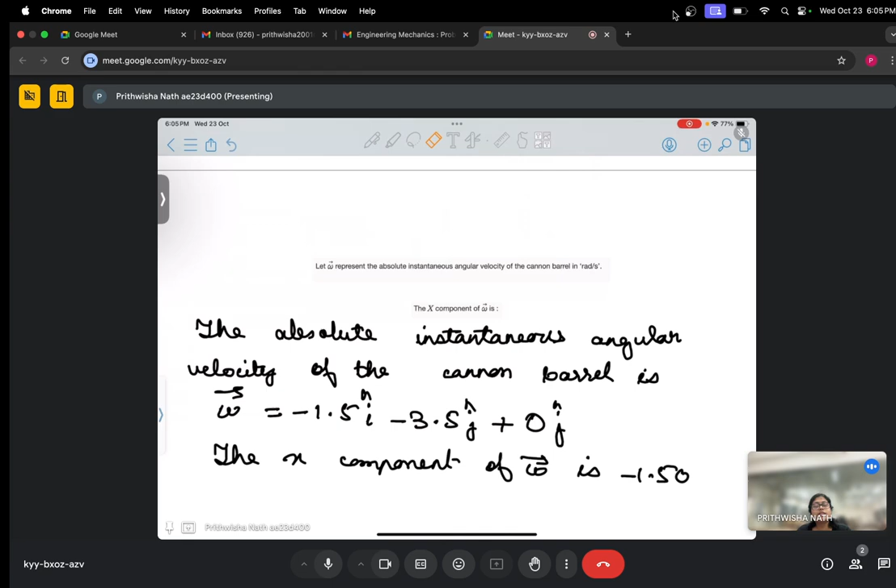So the x component is nothing but minus 1.5, the y component is minus 3.5, and the z component is nothing but 0. So these are the problems that we solved for this week. So we will stop here.